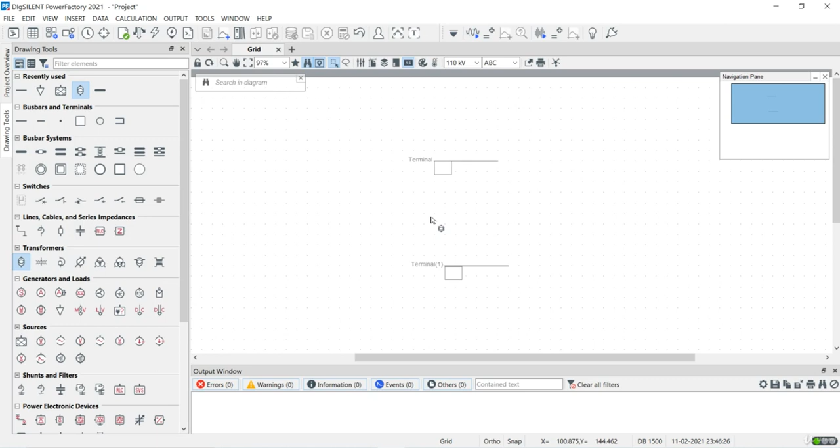So here you can see there is the bus bars and terminal in which I have to select the bus bar and I have to include it for modeling 110 kV and 33 kV bus bar here. So here it's already 110 kV and at here I'm changing the bus voltages to 33 kV and I'm connecting the two winding transformer between 110 kV and 33 kV buses and I'm defining the transformer type over here.

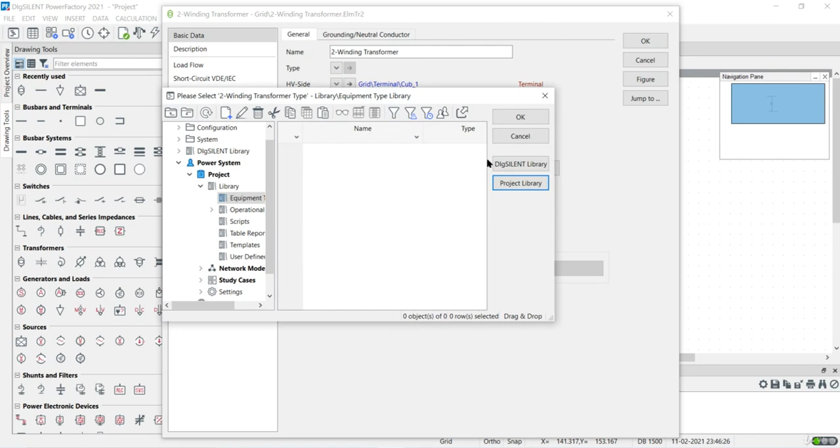So at here you can see there will be two options available. One is to select the transformer type and another one is to create the new project type. So when you have some existing transformer model available in your network, you can select the transformer model from here. In case if you want to create the new transformer model or new transformer type, you can click this new project type and you can see the new window popping up like this, and at here you have to enter the rated power of the transformer.

In our case I'm entering the transformer parameters at 25 MVA and I'm changing the nominal frequency at 60 Hz and I'm changing the rated HV voltage at 110 kV and LV voltage as 33 kV, and I have to define my vector group over here where I have to change my vector group as Dyn and I have to update my phase shift as 11.

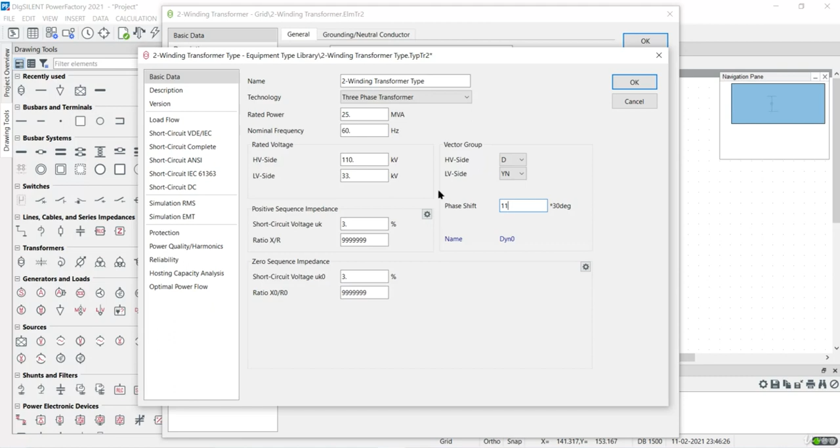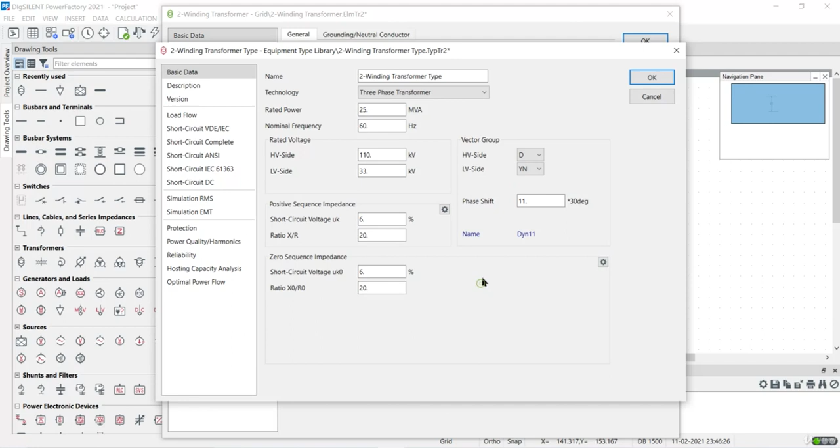So over here I can define my transformer impedance and X/R ratio, and I can also directly enter the parameters like copper loss or resistance and reactance in per unit by switching its input mode, and at here I'm keeping my short circuit voltage as 6% and my X/R as 20, and for zero sequence also it's 6% and X/R ratio of 20. With this I'm finishing my transformer modeling, and next thing is with the grid.

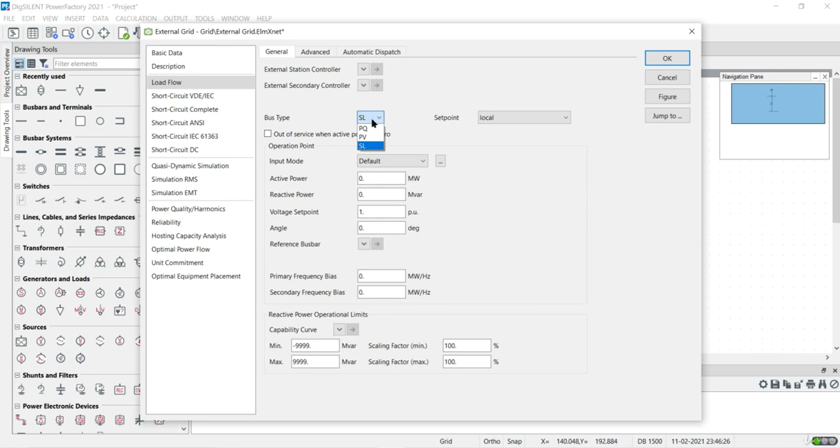So in the grid I have to change my bus type to slack bus. Yes, in case if you are leaving the bus type as PV, DIgSILENT PowerFactory automatically will take the PV bus as the slack bus for the simulation. And coming to the load, I'm connecting the load at the 33 kV and I'm setting my active power as 10 megawatt.

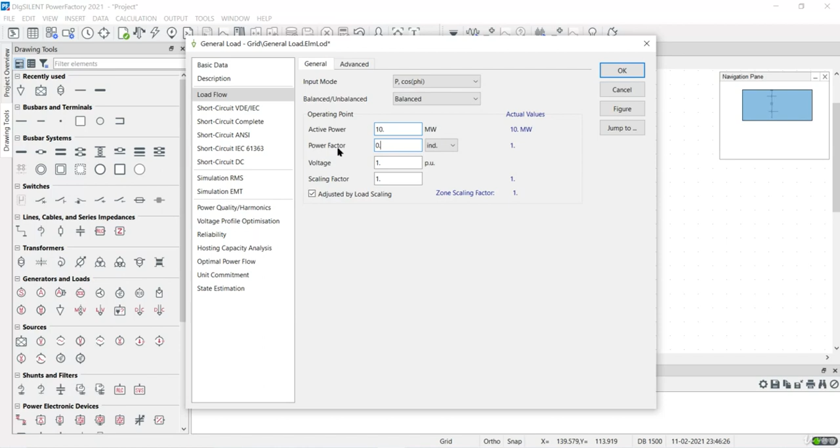So at here I can directly enter the active and reactive power, and I can also change my input mode from active power reactive power to active power with power factor. So for this I have switched my input mode to active power with power factor and I'm changing my power factor to 0.8. With this I'm done with the modeling, and if we need we can rename the bus names, grid bus, and

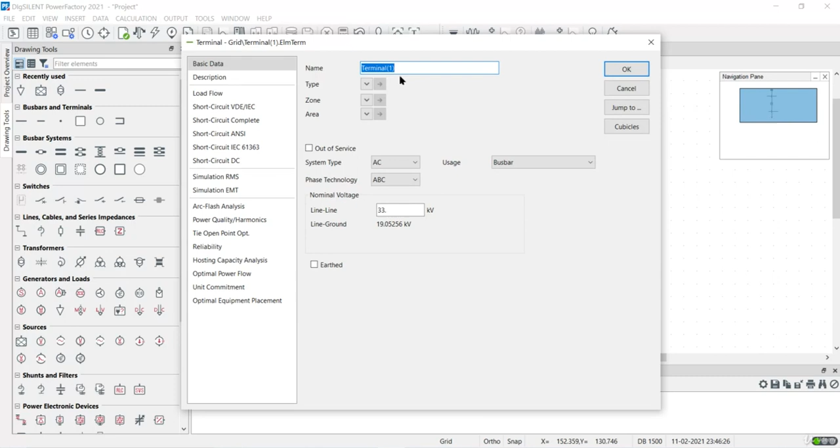with this the modeling is done, and the next step is to perform the load flow analysis for this simple network. So to perform the load flow analysis you can directly enable the load flow option by clicking this icon, or you can go into the calculation toolbar and you can select the load flow from here, and you can perform the load flow analysis directly using this.

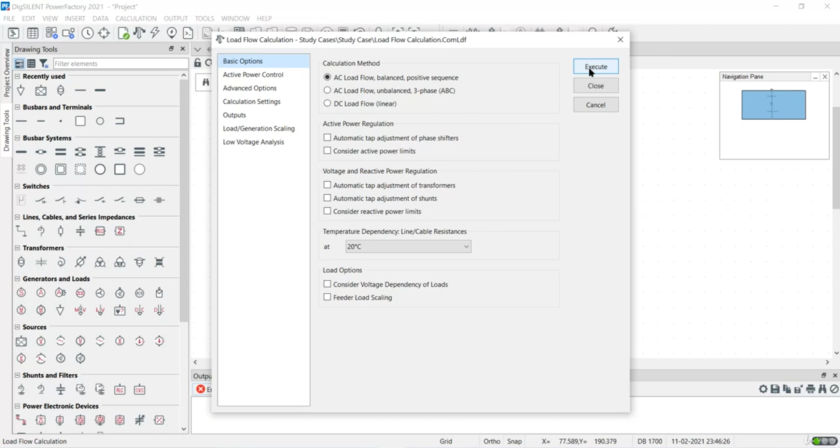So at here you can see that there are quite a lot of options available with active power regulation and reactive power regulation and temperature dependency and the load options. So we can see all these options on the later stage of the course. For now we can use the default settings available in PowerFactory and we can perform the load flow analysis. So yes, the simulation was completed and you can see the results in the network.

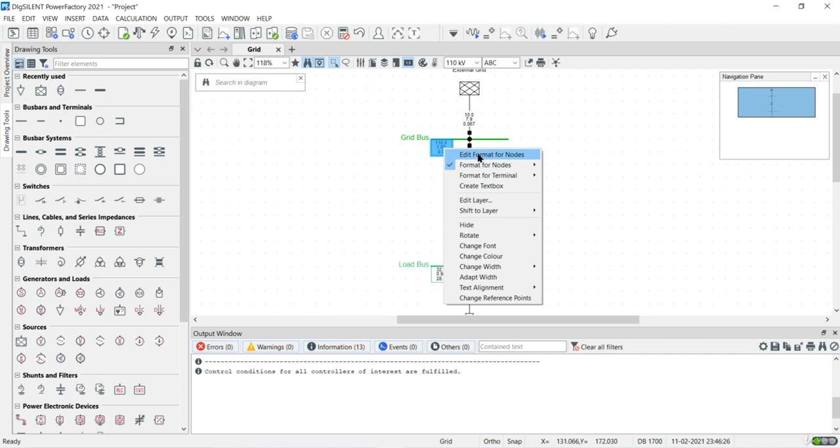So this is the bus voltages in per unit and the rated kV. So to enable the units, you can click this toolbar and you can right click and go to the edit format for nodes, in which you can enable the units for the bus terminals, and the same will be reflected on the single line diagram over here. So at here you can see that my 33 kV is getting reduced to 32.3 kV, and the per unit voltage is 0.98 per unit.

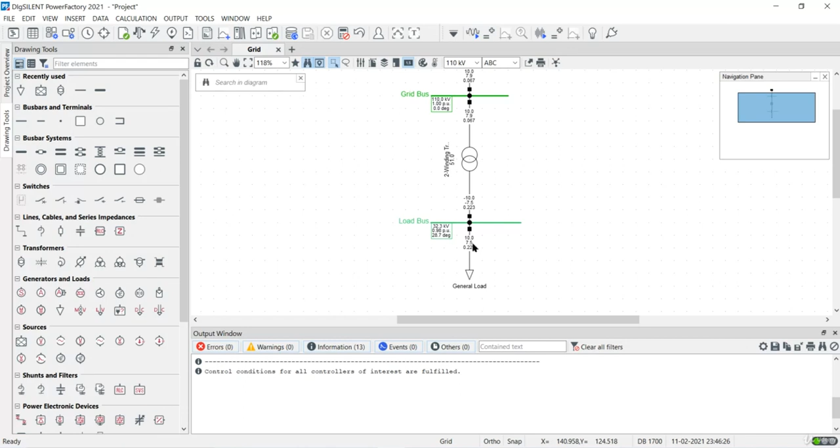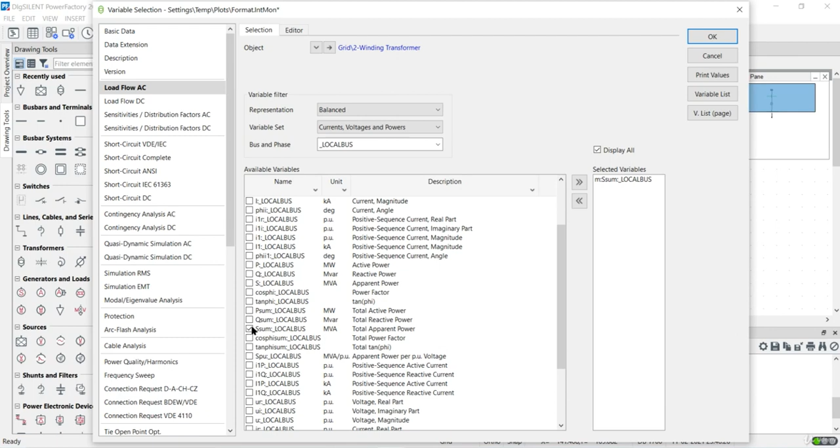So to see the branch flows and to enter the inputs, you can again go back here and you can enable the units, and you can also increase the decimal units, and if needed you can also include few more variables in the simulation. So if I want to see the total apparent power, this can be viewed directly from here.

So here you can see that the active power which I'm getting from grid is 10 megawatt, and the reactive power, the loss of reactive power is in the range of 0.4 Mvar. So if I'm increasing the precision, I can see more accurate values. So here you can see that the loss is in the range of 0.38 Mvar.

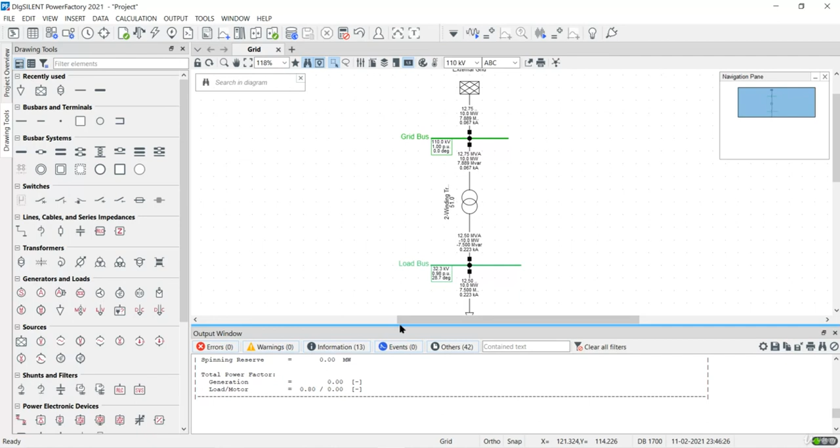So if I want to get the total summary of this network, I can directly go into the output toolbar and select the load flow, in which I can get the total grid summary. So for this I have to maximize my output window and I can see the overall summary from here. So here you can see that the grid was generating 10.02 megawatt and the load is 10 megawatt. So the grid loss totally is 0.02 megawatt.

And in the reactive power you can see that the total generation is 7.89 Mvar, and the load is absorbing 7.5 Mvar, and the loss is at 0.39 Mvar. So yes, this grid summary will give you the overall summary of your network, and you can get the overall idea about the components that you are using in your projects.